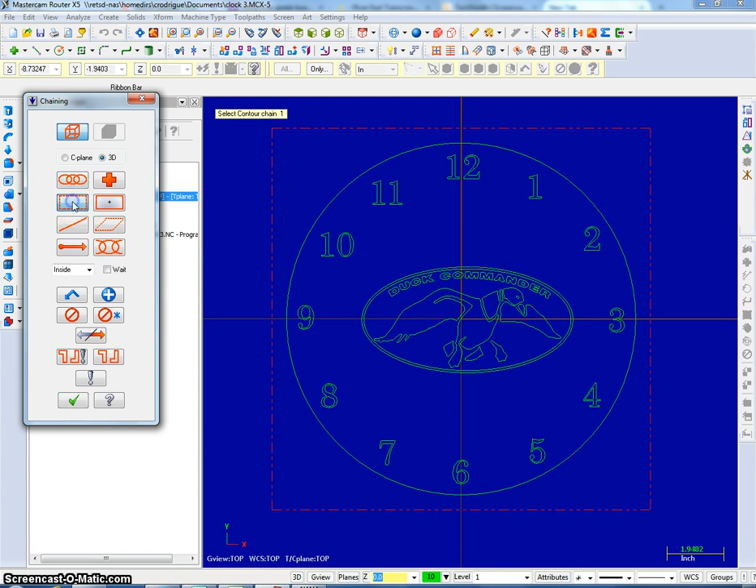We're going to select everything we have on our screen, and we're going to do that by changing our selection method to window. Then we can go ahead and just click and drag and draw a window around everything we want to do. And it says sketch approximate start point. Go ahead and pick wherever you like. I don't care. That pops up. We have now selected 62 chains in our contour. It doesn't really matter, but we go ahead and click OK now.

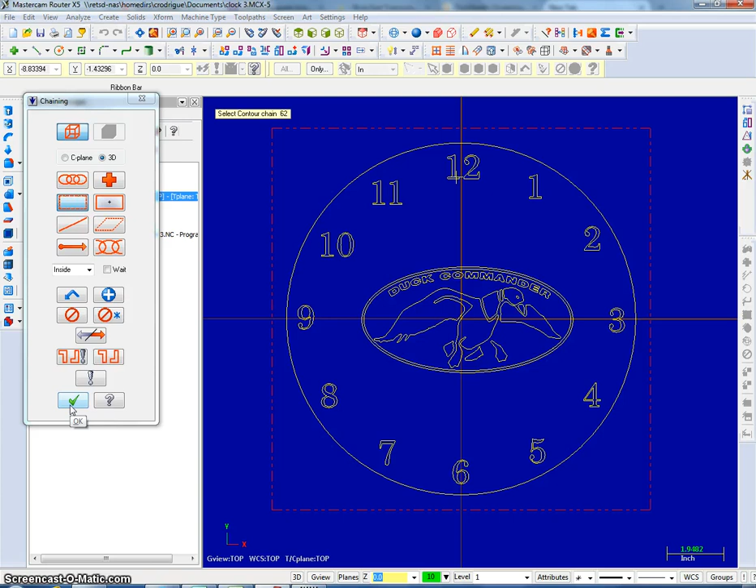Another window is going to pop up. It says 2D toolpaths. So toolpath type is the first thing to select, and of course we're going to select contour because that's what we were doing. The next thing we have to do, we're going to go down through most of these, not all, but we're going to select our tool. So you'll see there are no tools right now, so we're going to select tool library. Now we're doing engraving, so we're going to select a 1/16 inch straight bit. And we're going to go ahead and click OK, and there it is for us.

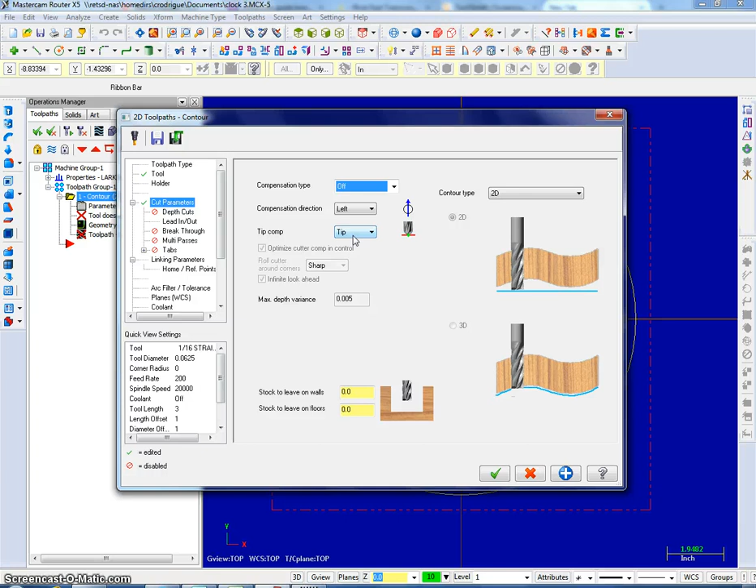Holder needs nothing. The next thing we have to do is go to cut parameters. And for some reason we need to turn the compensation type to off. I don't know why, but we do. We do not need to do depth cuts at this point, and we can also click on lead in, lead out and uncheck that box. We do not need that to happen.

The rest of this is okay until we get to linking parameters. Now we click on that button and we go over here and we change these all to absolute. And we're going to make the depth of our cut negative because we want to cut into our wood, -0.03. And we're going to go ahead and click OK, and that will give us our toolpath for engraving.

Okay. The next thing we need to do is to do another toolpath, and that toolpath is going to be to cut out the clock. So instead of us having to try and go to a bandsaw and make a circle really well, we can use the computer to cut this circle for us. And it'll turn out a lot better, trust me. I have a hard time cutting circles on a bandsaw.

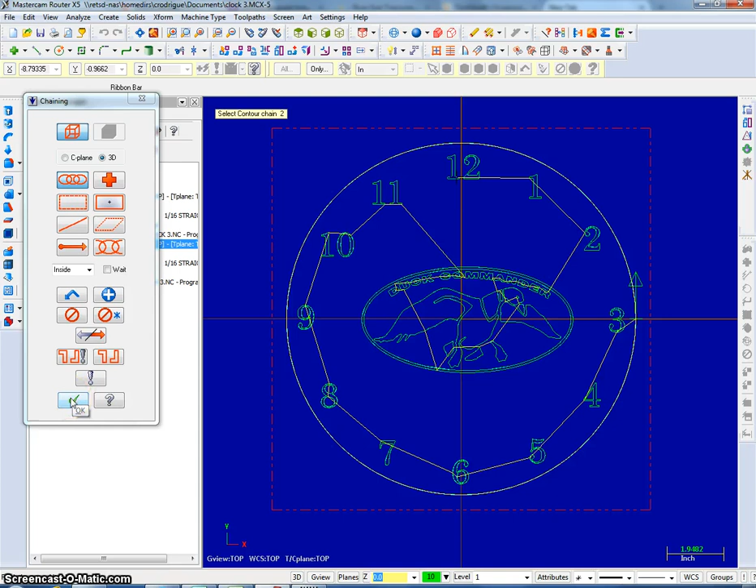So again, we're going to go over to toolpaths, select contour. This time we can be on the chain type, and we're only going to select the outer circle here. And you'll notice a little green arrow popped up over here indicating the direction. That's good. And we go ahead and click the OK button here, the green check mark. We pop up back to this screen again, toolpath type contour. Our tool is going to be a 1/4 inch bit this time. So we have to go back to select tool library, and we're going to select a 1/4 inch straight bit. Okay? And we'll go ahead and click OK.

Got a few other things to do here. Cut parameters, compensation still off, that's good. This time we do have to do depth cuts. I can't cut through a 1/2 inch piece of plywood in one shot, so I check that depth cuts box. And then my maximum rough step is going to be 0.125, or 1/8 of an inch. So if I punched 1 divided by 8 into a calculator, I would get this decimal. All right? And same thing, no lead in, lead out, no breakthrough, no multi-passes.

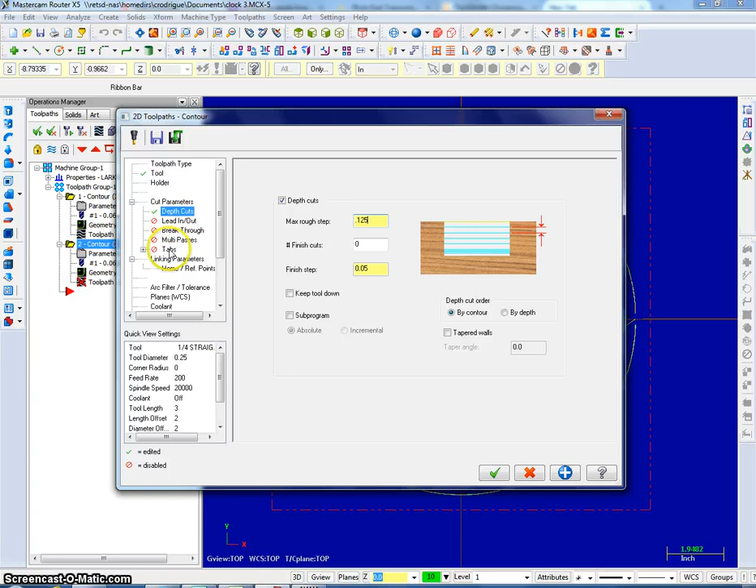This time we want to add tabs though. So we're going to click on that word, and we're going to check the tabs button there. That brings everything up. Now, the first thing we're going to do is change the size of our tab, and we're going to make it 1.25 inches wide and 0.25 of an inch thick. So it's nice and thick and will hold the wood into position.

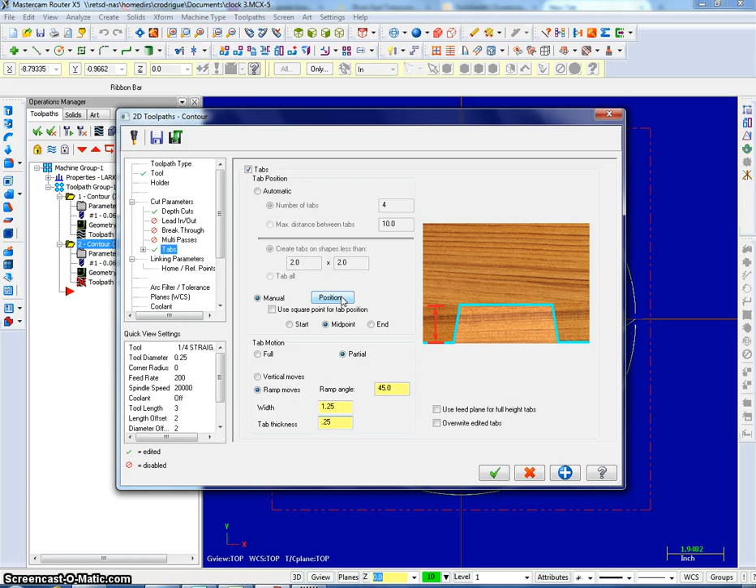Next we have to position our tabs, so we're under manual, we click position. We want to tell it where we want to put these tabs, and I like to put them in the corner, so you'll see the circle will turn yellow, and there's your tab, those yellow lines. We'll go ahead and click there once. It says select chain, add tabs. We're going to go ahead and do that, and we're going to put them in all 4 corners. Alright, now it says press enter when done, so 4 tabs, we're good, I'm done. I hit enter, there we go.

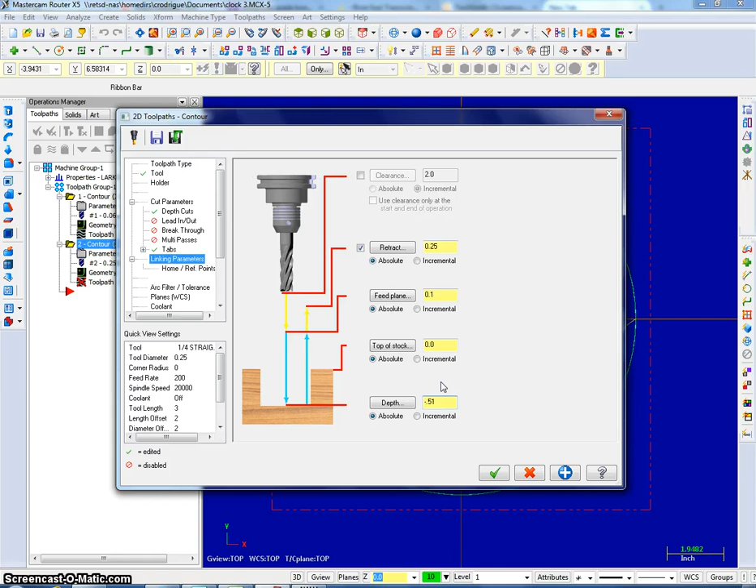And next we have to go back to our linking parameters. All these will be absolute again, and the only thing we need to do is to make our depth -0.51, because our wood is going to be 0.5 thick, so we need to dig in at least 0.5 and then a little bit more to cut all the way through. At this point, we are done this part, and we should go ahead and click the OK button.

You'll now notice that we have all of these yellow lines on here, and we're going to just make sure that everything is working and cutting the way we want it to. So we go back to the Operations Manager, and if we hover over these things here, we're going to select all operations. You'll see there's a green check mark on this folder and this folder. Both toolpaths are now selected. Every time you push the Regenerate All Selected Operations, it just cleans things up and gets them ready.

Now we move over to Verify Selected Operations. The computer will simulate the router cutting out the piece of wood. So we're going to go ahead and push that, and you'll see the piece of wood come up, which is green in this case. And we're going to push the Machine button, and it's going to simulate the router cutting into the piece of plywood. So we're going to go ahead and push OK. And it's going to start engraving and doing all its things.

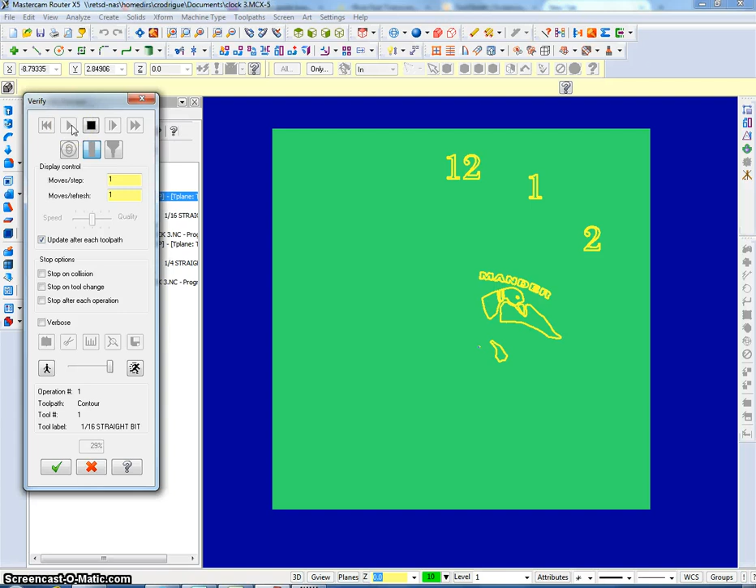And we'll just stop that now. We'll go right to the end, and it'll show us here exactly what it's going to do. Okay, so we're going to go ahead and click OK at this point. We're happy with that.